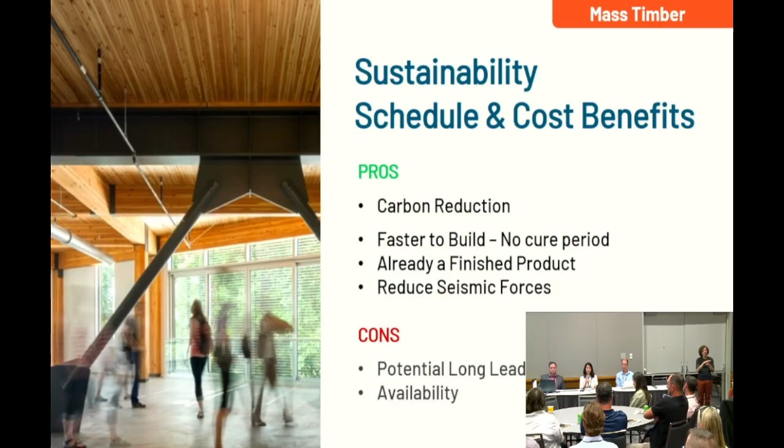So this graphic shows some of the benefits of the reduction in weight and seismic forces. The two photos on the left, the gray and yellow buildings, show for the same building type how much smaller your foundations or piles would be for a mass timber project. Then the photos on the right show, if you have the same foundations, how much smaller you could go with mass timber. So for us specifically on Timberview, we had some pretty poor soil conditions, and we originally studied concrete versus mass timber, and we saw a huge benefit in the sizing of the foundation, the reduction because we went mass timber instead of concrete.

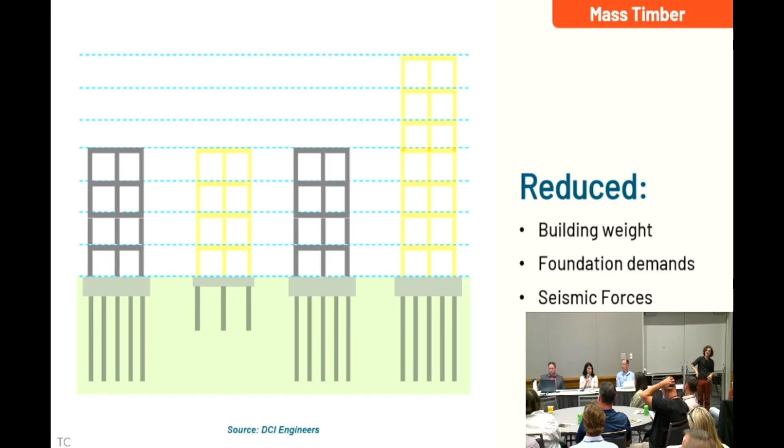There's logistical and labor benefits, so it reduces staging and laydown area. There's a lot less truckloads, so it helps with congestion and traffic for deliveries, and it's less skilled manpower on site. So as probably a lot of you know, the construction industry is faced with the challenge of having more people retiring from the field than entering the field right now. And so being able to find another building material that can use less manpower, I think, is a great advantage to the future of construction and reducing that standard.

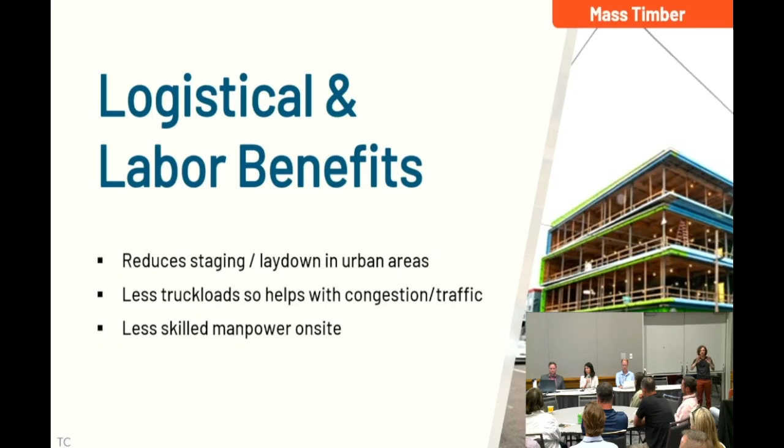There's also some great health benefits from the design of it. So this was a study that was published that showed in healthcare spaces there's a reduction in pain medication by 22% if you work in a wood environment space. Educational spaces have increased rates of learning, improved test results. Office design, increased productivity, and homes with 78% less crime attributed to areas with natural elements, and an increase of 4 to 5% in property price.

I can personally say I work in an office that's mass timber, and everyone loves just being in this space. We have so much natural light coming in and bouncing off the wood, and it really gives this warm, productive, uplifting feel. So I personally love every day going into a mass timber office.

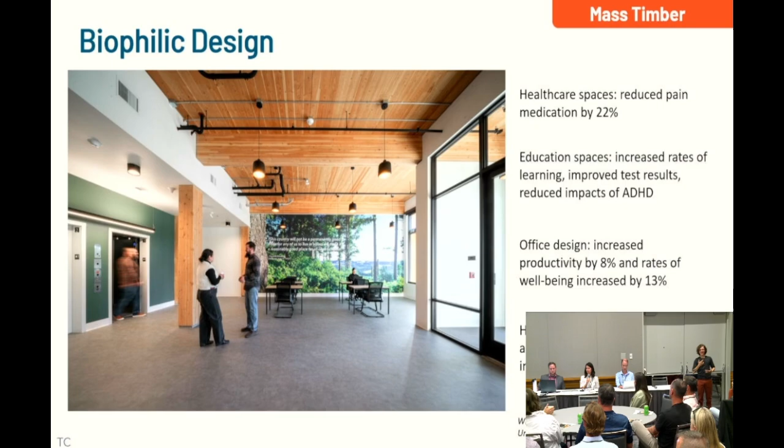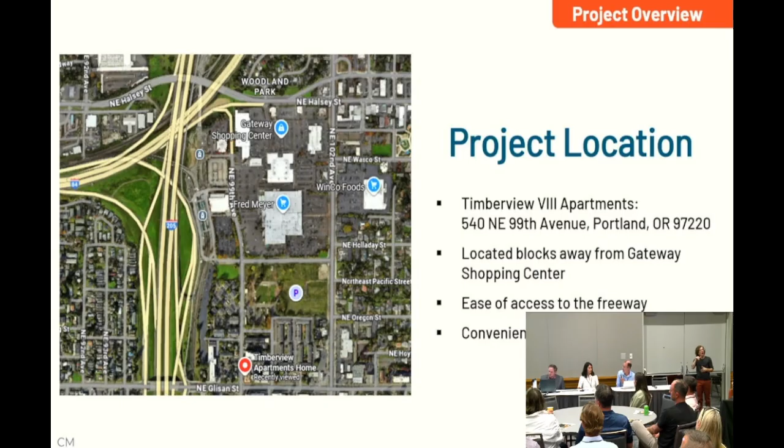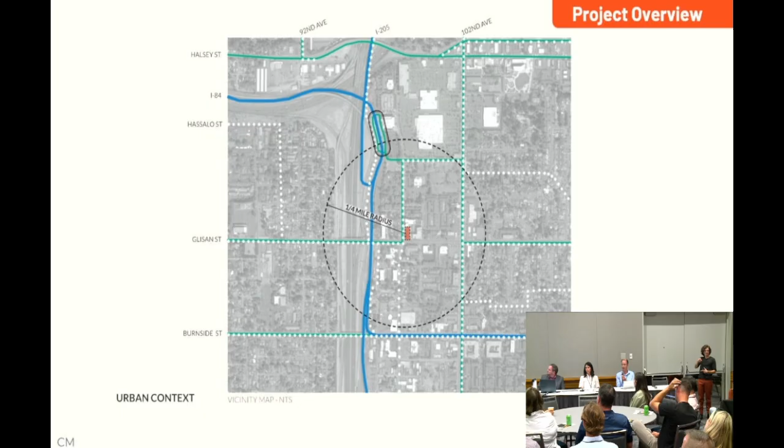A little bit about the project overview, starting with location. So Timberview is located on 99th and Glisan, very convenient to Gateway Shopping Center, in close proximity to some large shopping retail areas, which is important. That's a good proportion of where our tenant population came from. Very obviously ease of access in terms of freeway access, and the bus stop is right outside the front door, which is convenient. There is no parking structure or parking lot or designated parking at Timberview. It's all street parking, so the vast majority of residents, I'd say close to about 85-90% of residents, do not own or routinely use a car.

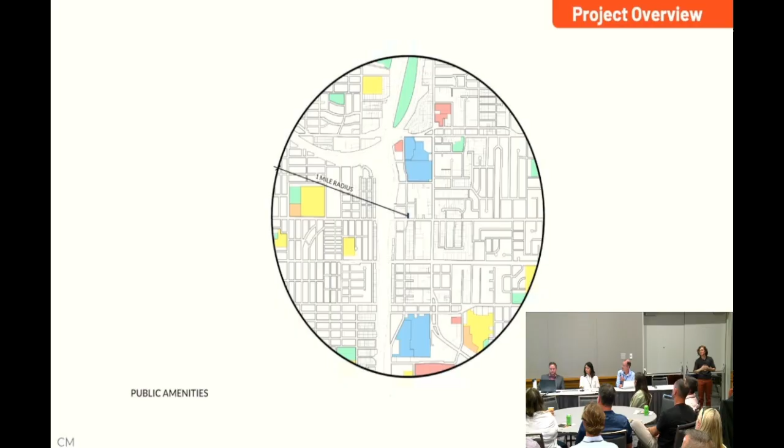Next slide kind of gives you an idea of where we are in terms of proximity to schools, proximity to other resources and hospital and health resources. But the very convenient location definitely helped overall in terms of lease up and stabilization.

Unit types. So the vast majority of units are small units, but we have some funds, especially LIFT funds, that came into the project that allowed us to create larger size units, which are very much in high demand in the area. So we have a mix of everything from studios to 3 bedrooms. About 28 studios and about 30 2 and 3 bedroom units, the balance of which are 1 bedroom units in the project. There's a beautiful community room located on the 8th floor with tremendous views.

On-site laundry located in the basement. Convenient, all the machines are down there. Bike storage, significant bike storage located in the basement as well. Somewhat unique to an affordable housing project, we have not only mail but parcel lockers as well, so that's a great benefit to residents. As packages come into the building, they're able to be secured and picked up by residents.

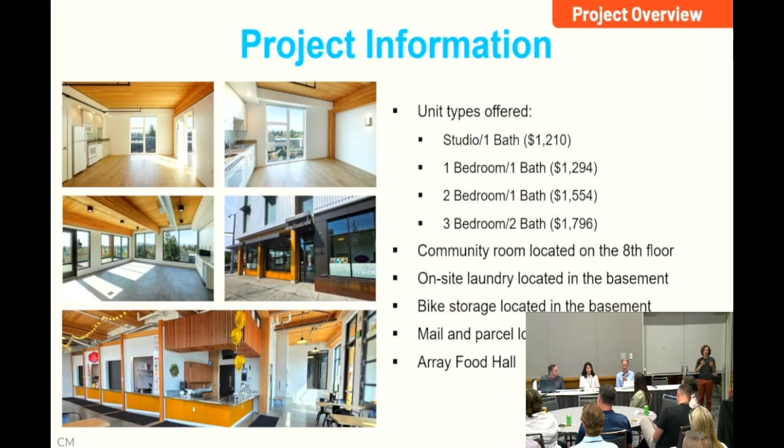And we have a food hall in the building, which has 4 food vendors and then a beer and cider alcohol vendor as well. So a great amenity for people to be able to have affordable access to food, and just very convenient for not only our residents but for the neighborhood as well. Kind of went over the unit sizes a little bit. This kind of gives you an idea

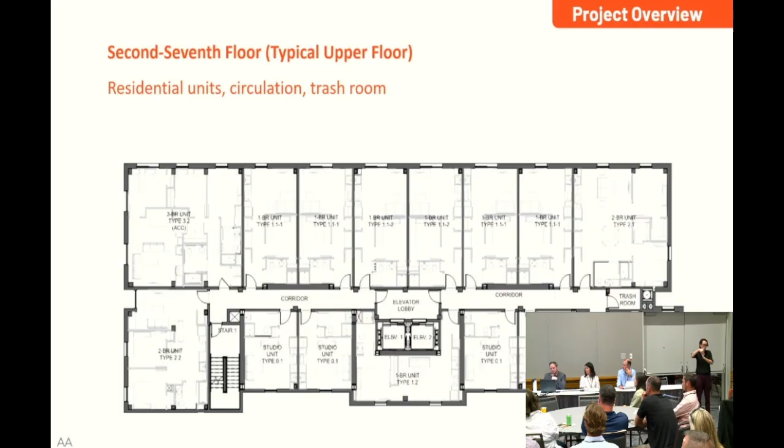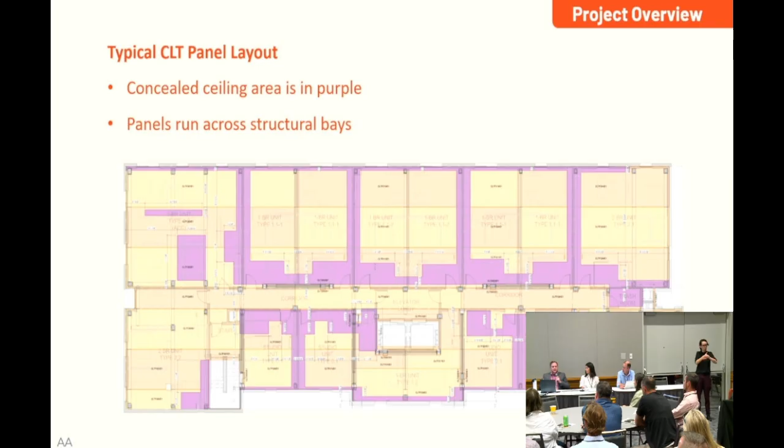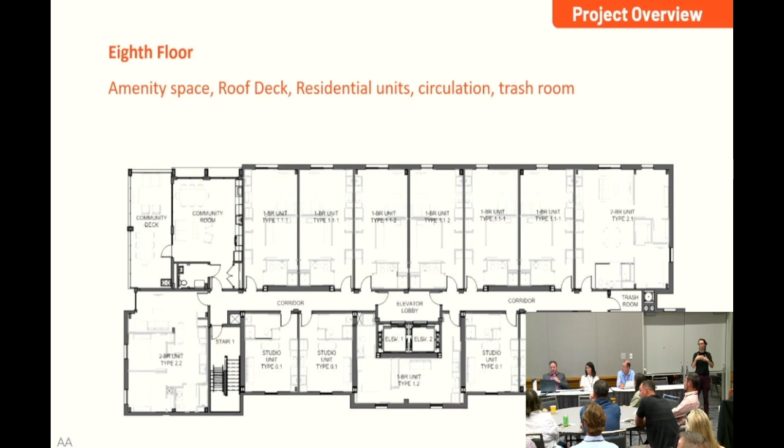Lastly, this is the top floor, very much similar to the 7 floors below it, but it does have that community deck and community room there that has those excellent views that you'll see a snippet of later. Now we'll take a look at the initial goals and concepts we started with when we first took on this project.

Portland needs housing. I don't think there's a single person in this room that would take exception to that statement. Understanding that, how can we maximize every development opportunity to provide the most effective and efficient version of itself? Mass timber allows 8, 12, and 18 or more stories, where typical wood construction would be limited to 5 or 6. Those 8, 12, and 18 are all based on Type IV A, B, or C construction.

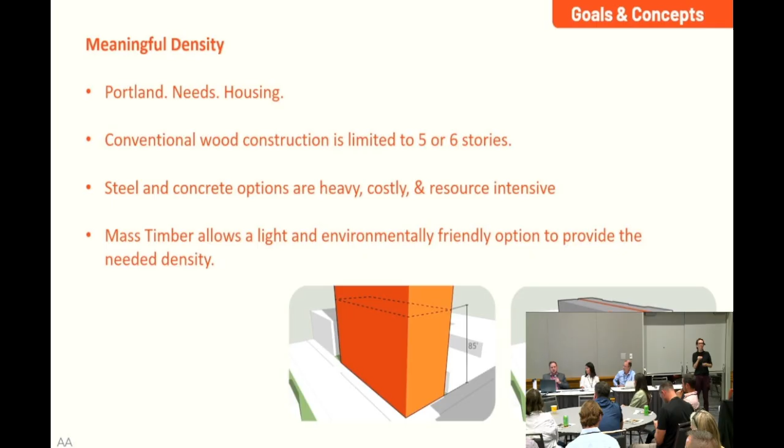So comparing this to typical wood construction, with the Type IV-C that we have, we were able to provide 2 to 3 additional stories. That added 30 to 45 more affordable housing units to Portland on this same lot that was occupied by just one single family house before. Timberview provides all of its 105 units at 60% area median income. Going beyond that, the developer wanted to ensure utility costs for tenants would not overly burden them.

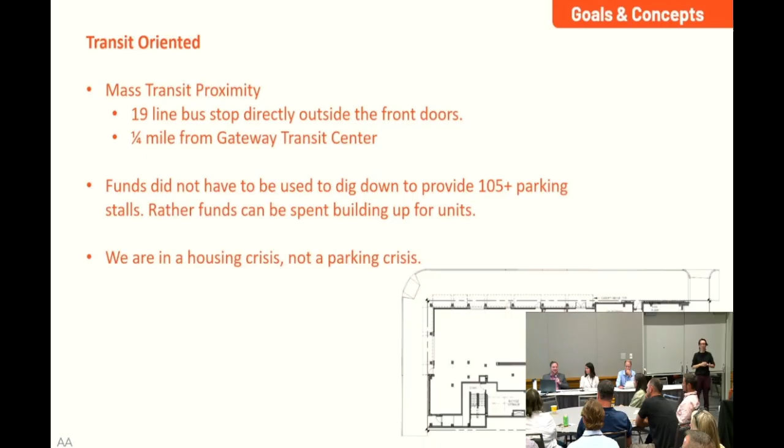The city of Portland recognizes its need for housing. From that need, the city has allowed and encouraged increased density throughout the metro area via code, FAR transfers, and available appeals. Ultimately, all of this is to say, this is not a unique site or an overall project. It is repeatable and expandable, and I encourage all of you to go out there and one-up us.

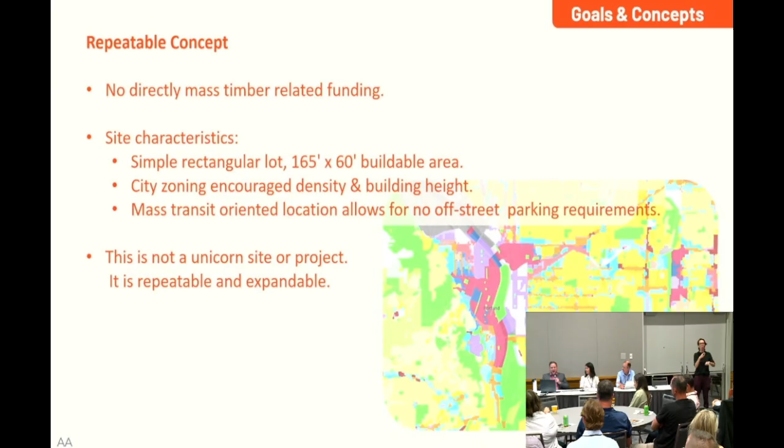All of that to say, being one of the very first projects to use a newly codified typology, our path to permit was often charting new territory. Timberview utilized Appendix P from the 2019 Oregon State Structural Specialty Code. Oregon, in an effort to encourage and champion mass timber, took action to include mass timber in its 2019 code cycle, which is based off the 2018 IBC.

Looking forward to the 2021 IBC cycle, Oregon incorporated the mass timber sections of that cycle early within the appendix. Timberview was quick to take advantage of this opportunity within a state that was quick to adopt mass timber. As such, during construction, Timberview was one of only 11 tall mass timber projects built or in construction throughout the nation. We used Type IV-C construction.

This allows 8 residential stories with up to 100% exposure of mass timber elements. As you move up to Type IV-B and A, the allowed height goes up and the allowable exposure goes down. That's kind of shown in that graphic there.

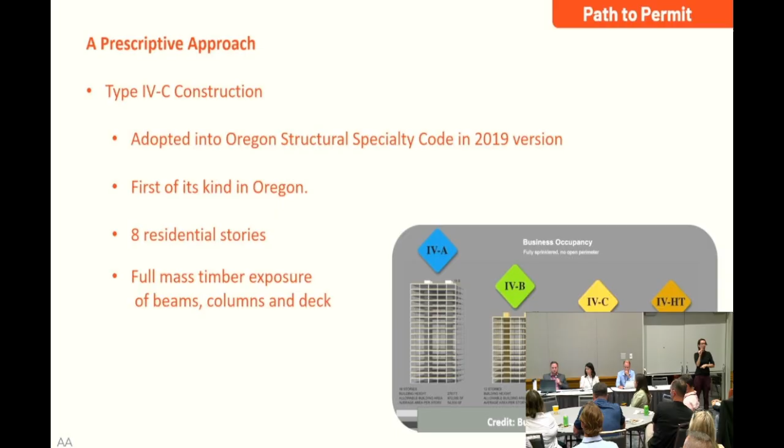Despite intent and efforts to create a building without appeals and alternate means, methods, and materials requests, it is a novel typology, and all the kinks and questions have not been resolved in this code. For example, we needed an engineering judgment for metal hangers to accommodate the story-to-story drift angle, which at that time was not tested by the manufacturer.

Additionally, we were asked by the city of Portland to file for an appeal on the fireproofing connection detailing you see here. This was not because we were seeking anything outside of code, but it was actually the best mechanism within the city of Portland permitting structure to get the various concerned parties all in the same room and able to buy off on what we were providing.

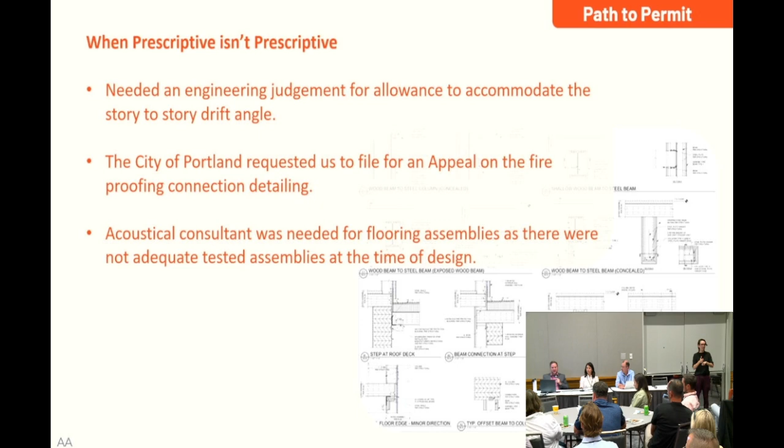Mass timber CLT construction is still relatively new, and sound testing of floor ceiling assemblies is not fully matured. As such, we needed an acoustical engineer to analyze variations from the tested assemblies for ones that met our needs.

Charting the new territory with newly adopted construction types required quick thinking and a responsive team. Ultimately, we have a lot of funding attached to this, and as we all know, funding comes with strings and timelines, really deadlines. And so, being able to think quickly and react and jump over these hurdles that we had to, while still meeting those deadlines in the end, that was where we really needed a collaborative effort from all of our team.

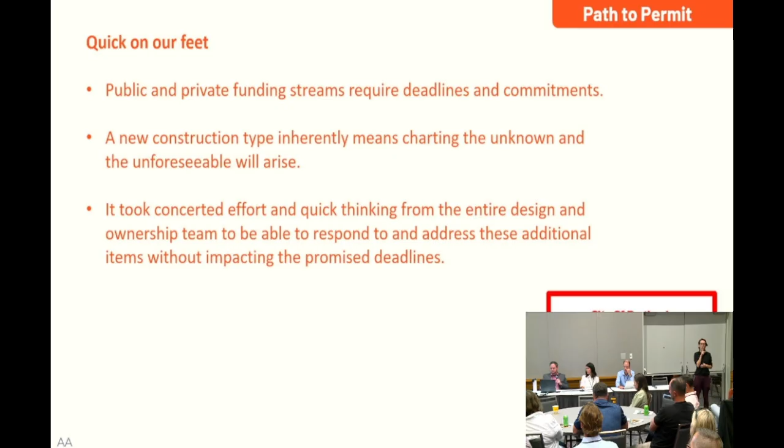So we'll talk real quickly about funding and how we paid for all this. So it's a $42 million project in total. $18 million of that came from LIHTC equity. About $4 million in LIFT. Those funds really allowed us to build those larger units, which was critical in this project. $3 million in GHAP, $50,000 in Energy Trust money, $500,000 in Metro Transit Oriented Development funds. We've secured $1.4 million directly from PHB and PCEF funds.

There was an additional $1 million that the general partner provided in a loan to basically complete those food hall improvements. It just wasn't really a great avenue to secure funds to complete that. That will be paid for in part through the increased proceeds from the permanent loan and from the proceeds that are generated from the food hall tenants themselves.

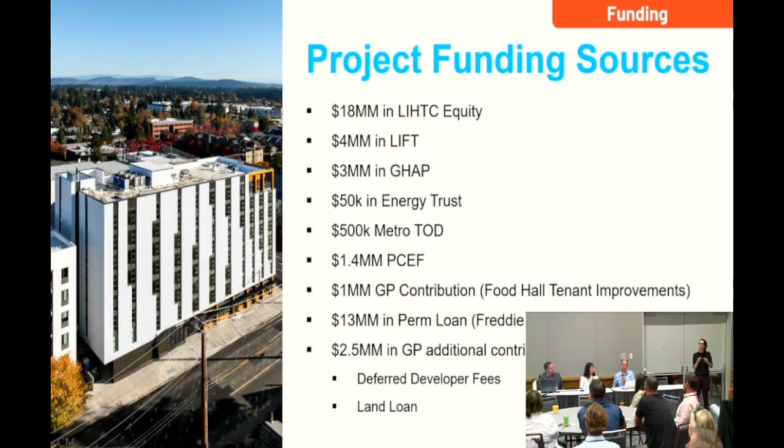And then a $13 million permanent loan. It's a Freddie Forward transaction. The project is not yet through conversion. We're probably about 45 days away from conversion on this to the perm. And then about $2.5 million in GP additional contributions, deferred developer fees, and land loan, which will be paid over time through cash flow.

So one of the challenges with this as we brought the project out of the ground was insuring it. From a technical aspect, mass timber has a higher fire rating, and so in a lot of ways it's a more secure building from an insurance perspective. However, it's also a little bit unknown. It's also seen by insurers as more expensive to rebuild. So it created a few barriers just to try to get insurers to bid and quote insurance.

It's a pretty tough market to begin with. For those of you that attended the insurance session yesterday, you learned a little bit about that. So we were dealing with very few companies that were willing to provide the insurance. And then on top of that, there was a requirement, because it was an 8-story mass timber building, that we needed an actual permanent C of O. I think insurers were very skeptical of a building that wasn't completely 100% finished and tested.

And so that led to some challenges in how to fill that gap between the builder's risk policy and the perm policy when we're potentially 60 days from the time that we start leasing and occupying the building to the time that we actually had a perm C of O. So we went to an alternative market. We actually ended up insuring the project through Farmers at a cost of about $36,000 a year, so not too bad to basically make that conversion and get the permanent insurance in place immediately.

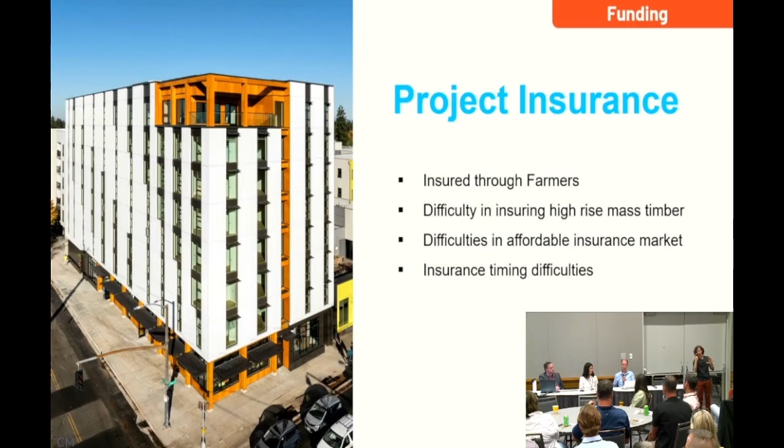So jumping a little bit into pre-construction and construction. So one thing with mass timber is having a partnership is really important. So as you probably are learning, there's a lot more coordination up front early. So we found part of the success of this project was having really everyone working together. So Access Architecture, DCI, the supplier Kalesnikoff with the mass timber panels, and ourselves, and client Cascade all together.

So some key items to consider when building with mass timber. So having experience with mass timber, I think I mentioned we brought some lessons learned from having done a couple mass timber projects before to work through early supplier feedback. They can really help optimize your panel layout, how you can get your most cost-efficient panels, the different material options. As David mentioned, in the exposed areas, we used a different grade, so really how we can optimize.

Cash flow and material deposit. So unfortunately, there are production lines you need to get into, and it's really important to put that cash flow together early so your client knows what you're needing to tie up early.

MEP coordination, so all of your panels come out with any penetrations already done. So we coordinated all of the fire sprinkler, any plumbing penetrations, modeled them before they were sent to be fabricated. It helps with speed in the field. We're not having to drill a bunch of holes and go in after the fact, but it does require upfront work in pre-construction.

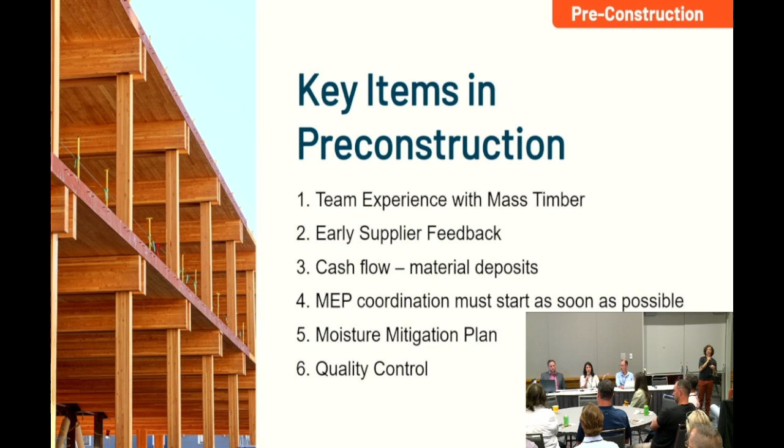A moisture mitigation plan, we'll talk a little bit more about that when we get into construction, but you do want to make sure your wood is protected, and a quality control plan, since everything is going to be left exposed. So you can't really cover any mistakes through construction.

A little bit about supplies. So mass timber is being fabricated all over the world. We have places here in Oregon, up in Canada, up to the north we get supply as well, and then more coming online down in the south of the United States.

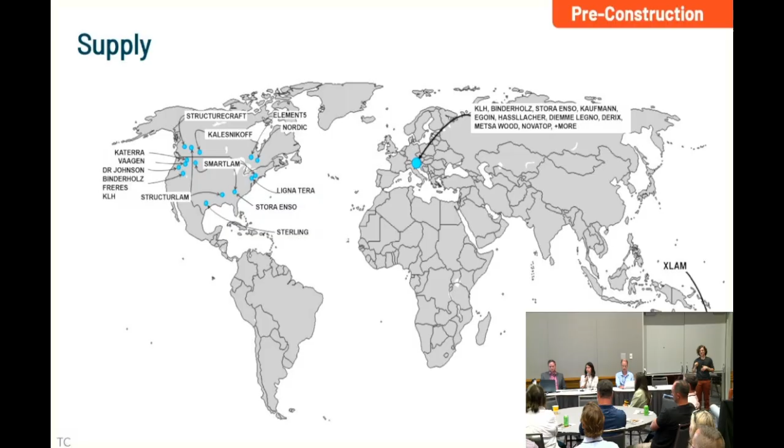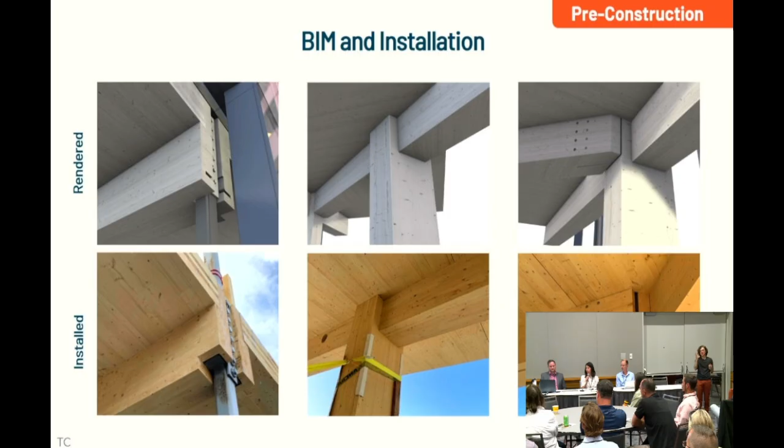Now the fun part, let's start building it. We've spent a lot of time planning, time to get up there and feel. So Timberview used a mix of steel and mass timber for our structural system. So we had BRB and columns in steel, and then the CLT deck. So you can see in this bottom right picture where that steel frame was in the decks. For the best sequencing, we did 3 levels of steel, and then we came in with the wood, another 3 levels of steel, and came in with the wood.

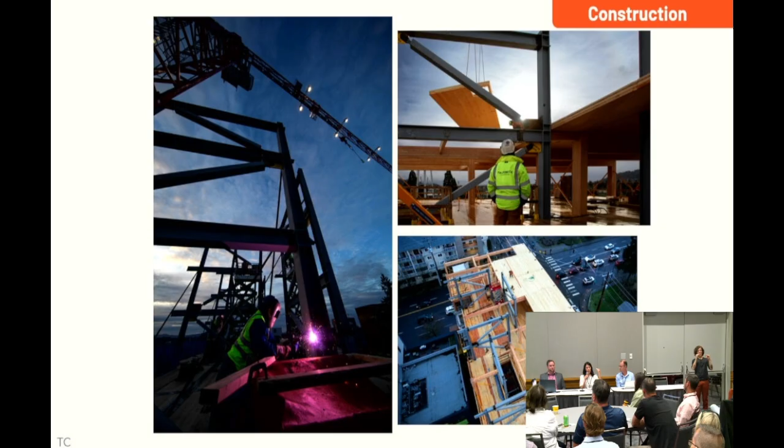Our moisture management plan, we sat down with DCI engineers and Access Architecture ourselves to really talk through CLT and the glulams, what sort of expansion we could be seeing in the wet months. Really encourage you to bring your structural engineer into that conversation. All woods can react a little bit different to weather, so making sure you're planning and designing for it.

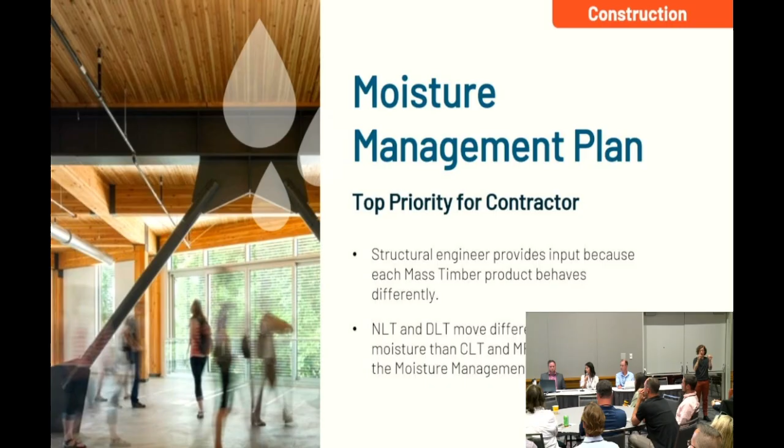And then the weather control. So the good news is wood's supposed to get wet. It dries out, it's fine. But it's really important to think about the time of year when you're erecting the wood, how long it's going to take, how long it will be exposed.

So a couple things we did on this project to try to minimize the time the wood was exposed was we had panelized walls. So right as we got a layer of the decks up, we were coming in with the panelized walls to try to get floors enclosed, so the wood was not as susceptible to the rain and weather. There's a lot of temporary measures you can do, and so it's important in that quality and moisture plan to think through what as a team you want to do before you start the project.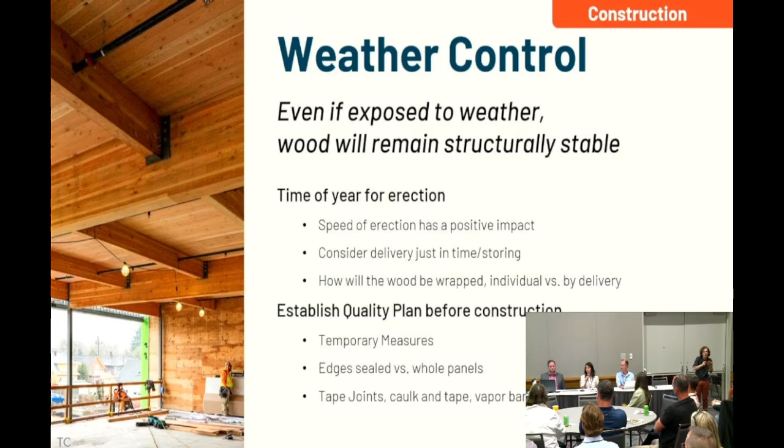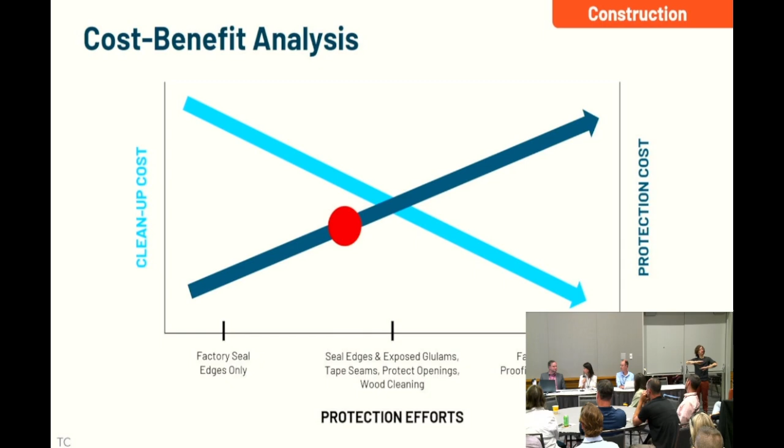We made kind of special little dams around all the columns because we had pretty big steel running through and column openings, so we had dams to make sure water wasn't flowing through there. And then we held a budget at the end for a little bit of cleaning. So we didn't go through and sand, some projects they'll want to sand all the wood. We just did a little spot cleaning in some areas where we did have a little bit of staining. And I think overall the team was pretty happy with the final product and how much we spent on protecting it.

Lucky for us, we had originally planned that we would probably start installing the wood earlier in the summer, but because of permitting and other small delays, we did not start until September. So right through the wettest season of the year here, I think it rained almost every single day we were erecting the mass timber. We had a huge ice storm. So we were really happy we had spent the time putting together the plan before we started construction.

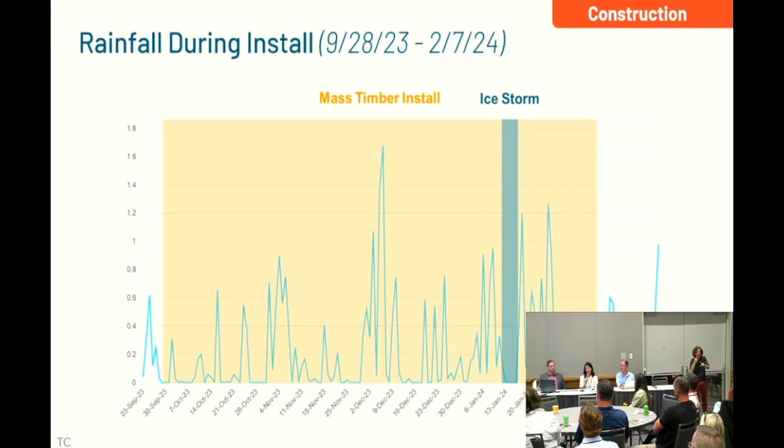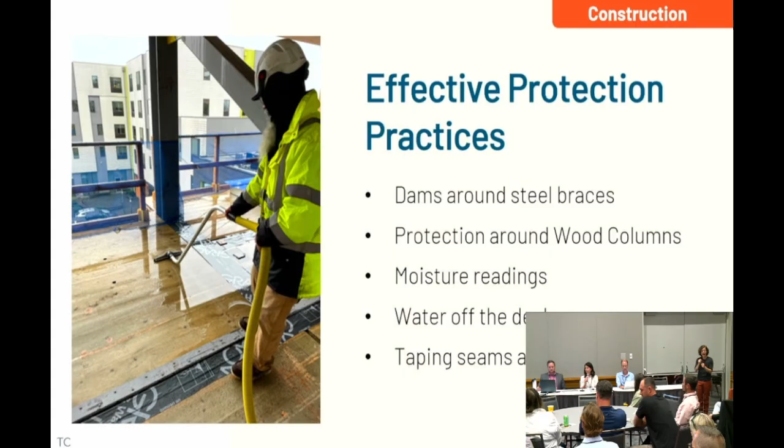But I think as a team, we sat down and talked about after we finished erection, what would we have done different, and trying to do bolted would have helped us pick up speed to make the project even faster. Overall, there were only 10 workers that had to install mass timber. So the structure was a small crew and it went up pretty quick.

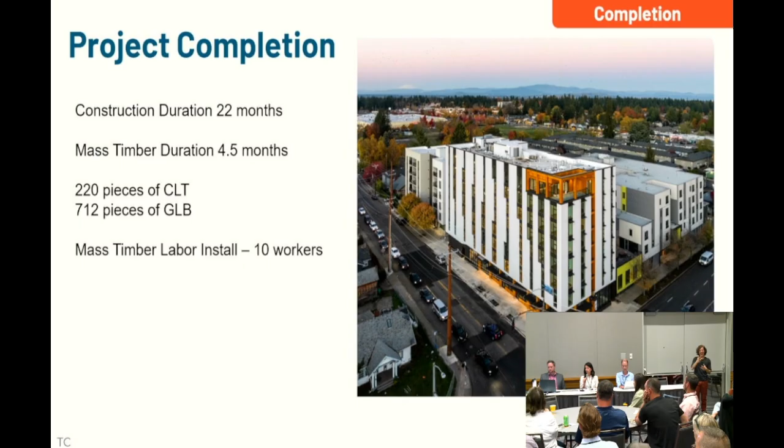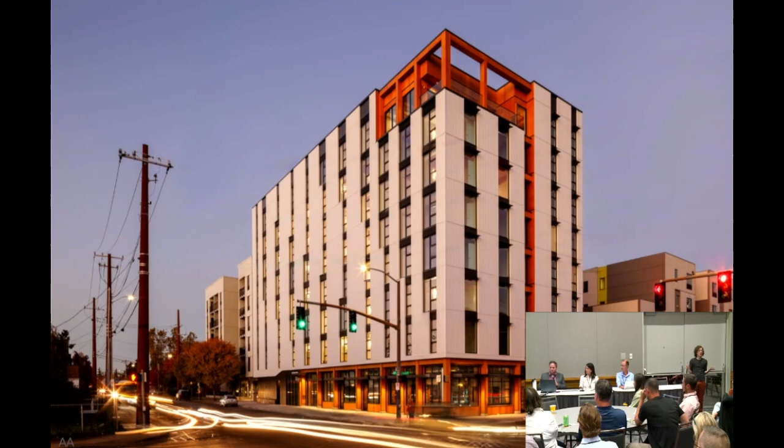So after all of that, how did it go? I think you can see here, it went pretty well. I think this is just a really beautiful project, and one that we're all proud of. So this is the resident entry here. Just some details that I can kind of go over. We have the structural column that's actually exposed on the exterior. We took the envelope and kind of pushed it back to highlight that this is this mass timber building and really showcase that.

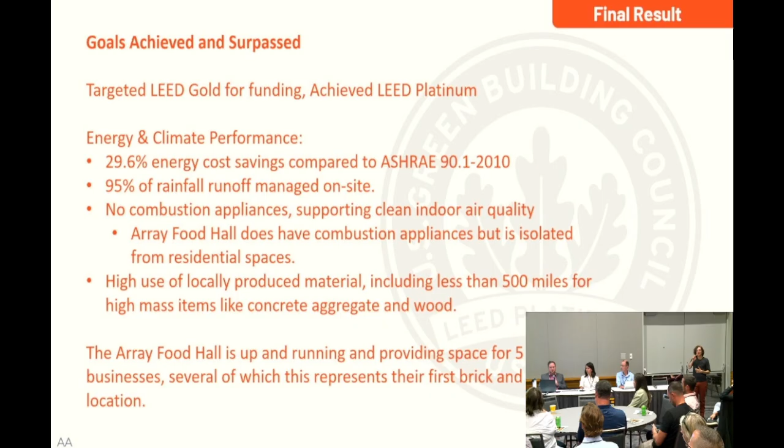So, how was the project received? Overall, it was received very well. A lot of the things that were anticipated in terms of what would be easier in absorbing the project and getting residents in occurred, and some of the things that were more challenging were definitely more challenging. We were dealing with a smaller market just because of the lack of on-site parking, so that was a bit of a barrier coming in. And the competitive market for smaller units was something significant that definitely wasn't as prevalent when we first started working on the development of this project and funding for the project.

So as anticipated, I think we were delayed about a month or two coming out of the gate. So a lot of that pent up demand, we lost a few of those folks, but still rented to a considerable number of folks who saw the project being erected. It was a beautiful project under construction just because of the natural wood elements. So that was super helpful. People were very eager to get in, and as a result, as you can imagine, the 3-bedrooms filled immediately, the 2-bedrooms filled more or less immediately.

The 1-bedrooms then started to occupy at a pretty good pace as we were working through the winter months, and the studios were lagging. The studio units were the last to occupy, pretty much every single one of them. We did discount them with concessions, a couple $100 a month, but we were able to lease them in large part just because of the momentum generated by the rest of the project.

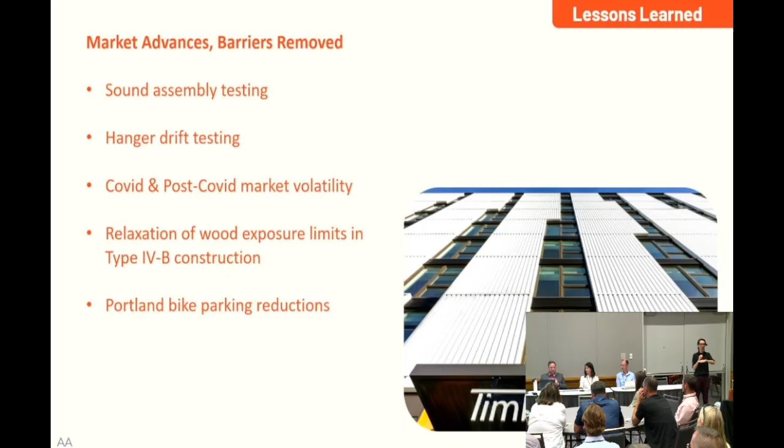Yeah, so a couple new barriers, tariffs and market uncertainty. So with the mass timber, some of it coming out of Canada, that is a question that I have clients asking me often: how is mass timber pricing changing? So something just to watch. Again, the early cash flow and deposits, we talked a little bit about that. That can be a hurdle sometimes depending on how your funding is.

And then the AHJs have become more familiar with mass timber, which is good, but they're asking a lot more questions and want a lot more documentation. On this project, a lot of our inspectors hadn't really ever been at mass timber and talked through and were really collaborative, and now they're catching on and asking for a lot more.

And then just some challenges faced that we would encourage everyone to think about when considering mass timber is construction sequencing of the steel and the wood. So there's a couple different structural ways you can work with mass timber. You can have concrete cores, you can have steel cores, really talking through and encouraging to have your contractor on board to help give feedback early on that. Welding, again, we're trying to protect the wood, and you have welding and we have blankets covering huge areas. So trying to look at doing bolted steel instead of welding. We all felt like we would sleep better at night if we hadn't been welding a bunch.

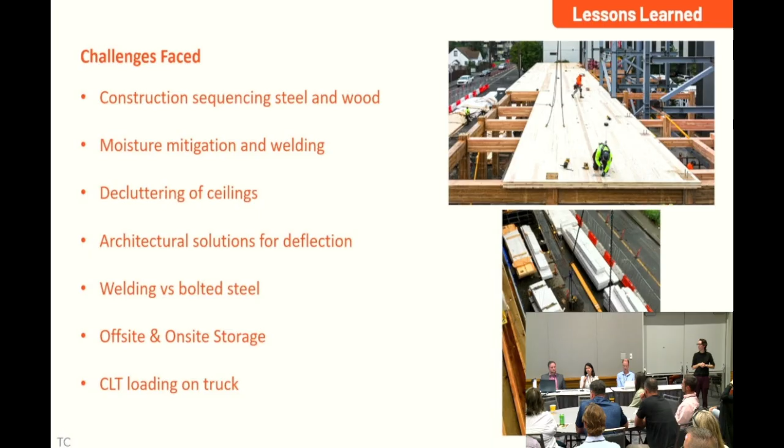So to be most efficient, you want to make sure that you have your CLT stacked the exact way you're going to pick it and put it into place. You don't want to have to move a couple panels and set them down. And there's different clipping methods on how you can erect the CLT, so talking about that as a team for the most efficient way and working with your supplier.

So what do we love about this project? This is a beautiful project that everyone can take pride in. Beyond it being a project that the three of us have been excited to share with you, it is a project that Oregon can point to as a success of its early mass timber adoption. Portland can mark it as a beacon of higher density in a neighborhood where it has taken concerted effort to shepherd it. The Gateway neighborhood can enjoy its food hall and the benefits that mixed-use development brings. Lastly, and most importantly, the tenants can live in a premium biophilic unit at affordable housing rates, and that's really special.

I would just say mic drop there. That's pretty much how I feel. It was such an inspiring project to work on, and to really collaborate with Access Architecture. We hadn't worked together before, and DCI Engineers, all together to make this project come to life and work through the challenges. Every construction project has challenges, but David was a great partner. We would all get together in the trailer and work through some of the challenges, and just inspired to continue to build. I hope that others have learned some from this presentation. Try to challenge your clients to look at mass timber, see if we can get it more adopted through the construction industry.